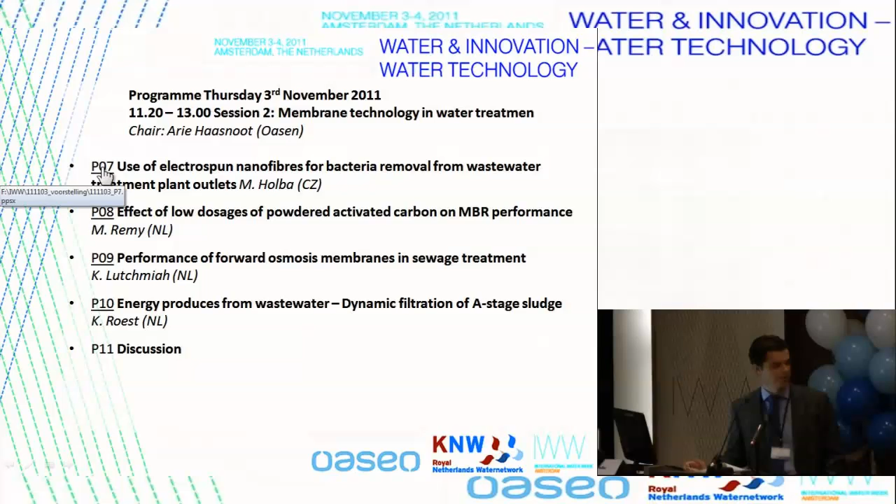I would like to invite, as first speaker of this session, Mr. Marek Holba. He works at the Academy of Science of the Czech Republic. He graduated in 2003 on wastewater treatment, and he will talk to us about the use of electrospun nanofibres for bacteria removal. Mr. Holba, may I invite you?

Okay, thank you for the introduction. My speech will be about the use of electrospun nanofibers for bacteria removal from wastewater treatment plant outlets. This research is part of a huge grant project of the Czech National Foundation that involves ASIO, an engineering company. I'm actually from ASIO. Another medium enterprise is there, a company called Spur, that owns the device that is able to produce nanofibers by electrospinning.

Then other institutions are involved: the Mendel University in Brno, the Institute of Botany, Academy of Science of the Czech Republic, and the last one is the Center of Organic Chemistry of Pardubice, which is responsible for synthesis of materials.

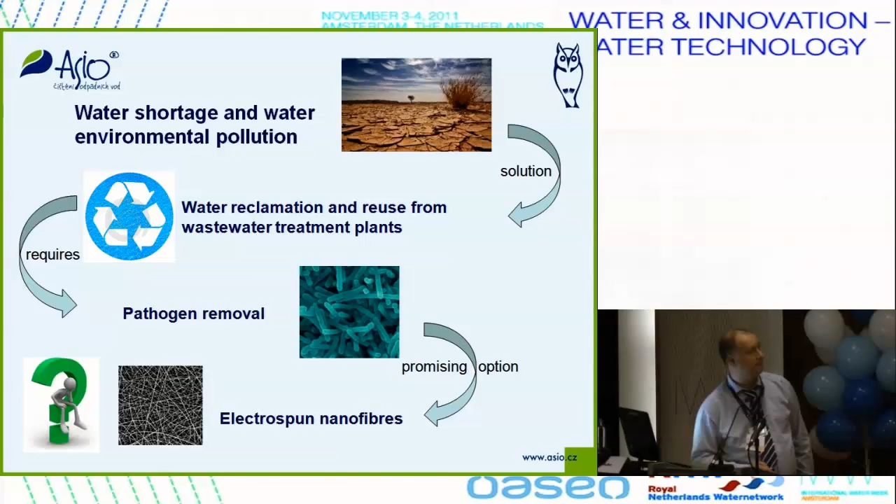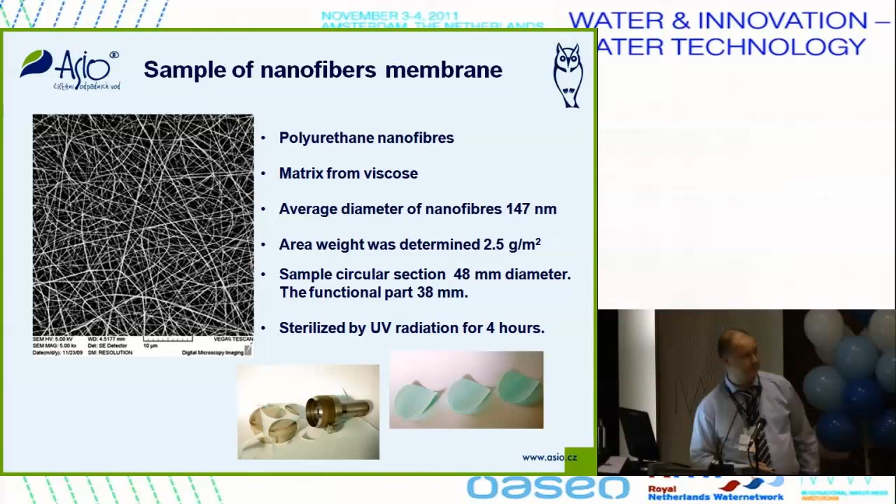Here you can see the scanning electron microscope picture of the electrospun nanofiber. For our research, we started to work with polyurethane nanofibers that are placed on a matrix of viscose. The average diameter of the nanofibers was 147 nanometers. Before the nanofibers were used, we sterilized them by UV for 4 hours.

We decided to take samples from 3 different wastewater treatment plants that also have very different technology. The wastewater treatment plant for 500,000 population equivalent has to fulfill very strict outlet limits, which are 1 milligram per liter of total phosphorus, 12 milligrams per liter total nitrogen, and 45 milligrams per liter of COD.

Then we chose a wastewater treatment plant for 8,000 population equivalent that has to fulfill less stringent limits, about 3 milligrams per liter phosphorus and 25 milligrams per liter total nitrogen. And we also chose a very small wastewater treatment plant which has less stringent outlet limits: only suspended solids, about 70 milligrams per liter, and COD about 150 milligrams per liter. Of course, different technologies are used, and very different amounts of bacteria were expected in the outlets.

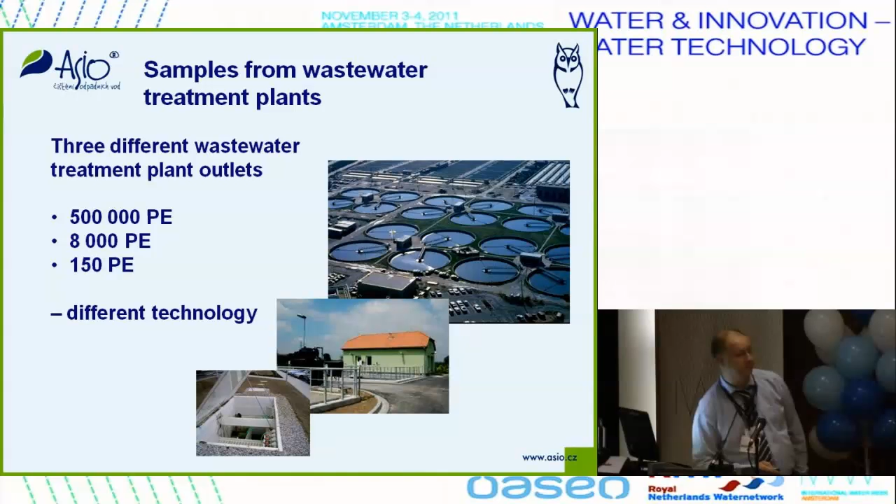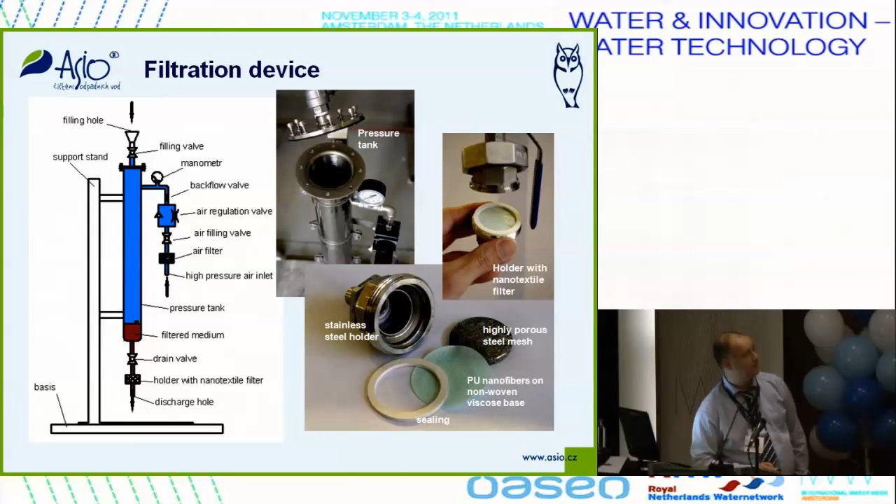This is the testing device which we used for our tests. This is how we performed the test. We took 100 milliliters of the grab sample and placed it into the device. We applied a pressure of 1 bar, filtered the sample, and measured the concentration of microorganisms after filtration. Here is where the nanofiber is placed. The device was always sterilized before every measurement.

We decided to compare our results with national legislation about water reuse, or reuse of the water from the outlets of the wastewater treatment plants, which is possible by Czech national legislation. There are several standards, and most of the standards are focused on those kinds of microorganisms: cultured microorganisms at 22 degrees and 37 degrees, then thermotolerant coliforms, then Escherichia coli, and intestinal enterococci.

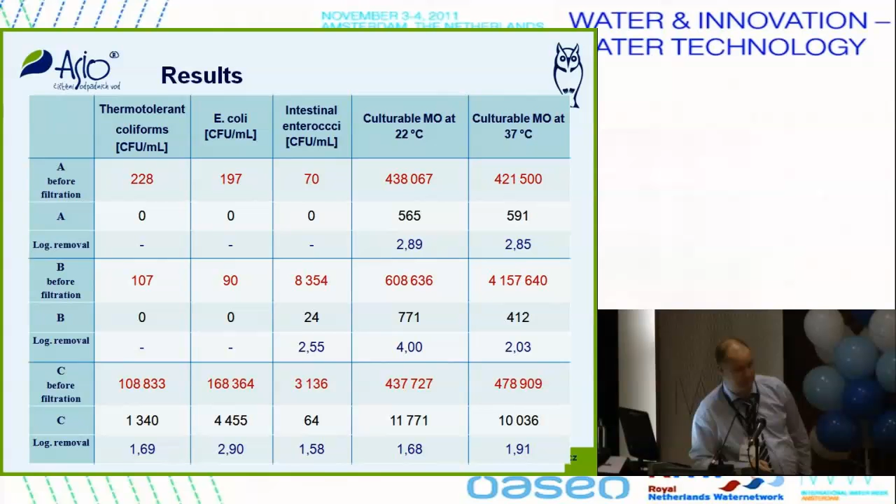We always calculate it as CFU per milliliter and triplicate every measurement. Here are the results of our experiments. That's an average from several measurements. As you can see, it's visible that plant number C, which is designed only for 150 population equivalents and doesn't have such advanced treatment, has so many microorganisms. And as you will see also in other slides, it doesn't fulfill most of the national regulations on standards for water reuse.

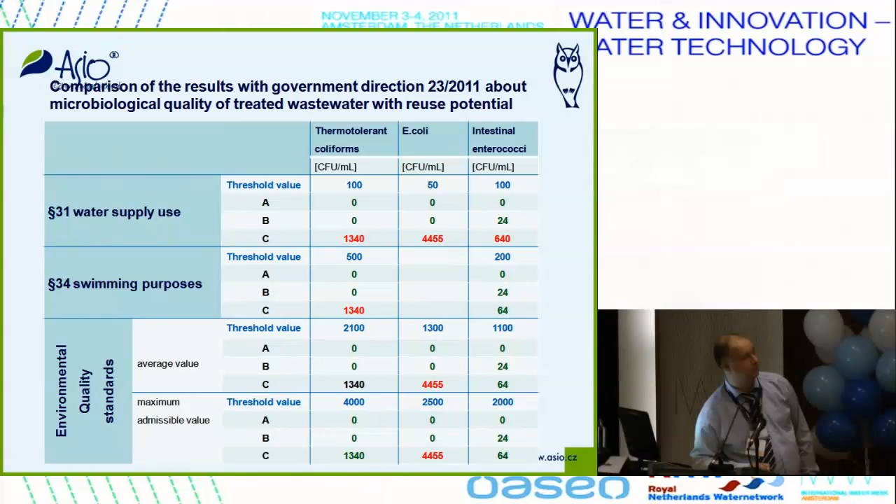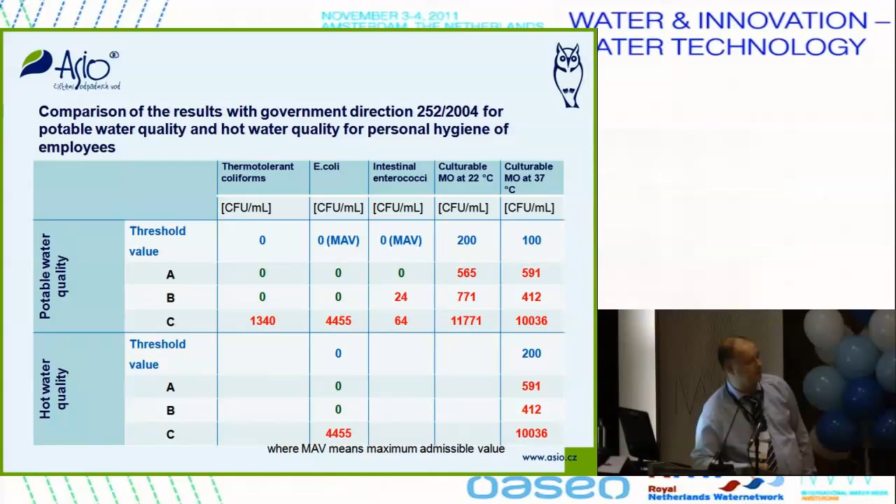Another government direction which we are trying to compare to is the government direction for potable water quality and hot water quality. There are also other microorganisms mentioned in this direction, but we did only those 5 because it was necessary for most of our tests. So as you can see, for potable water quality it was impossible to achieve values lower than the threshold value, and also for hot water quality.

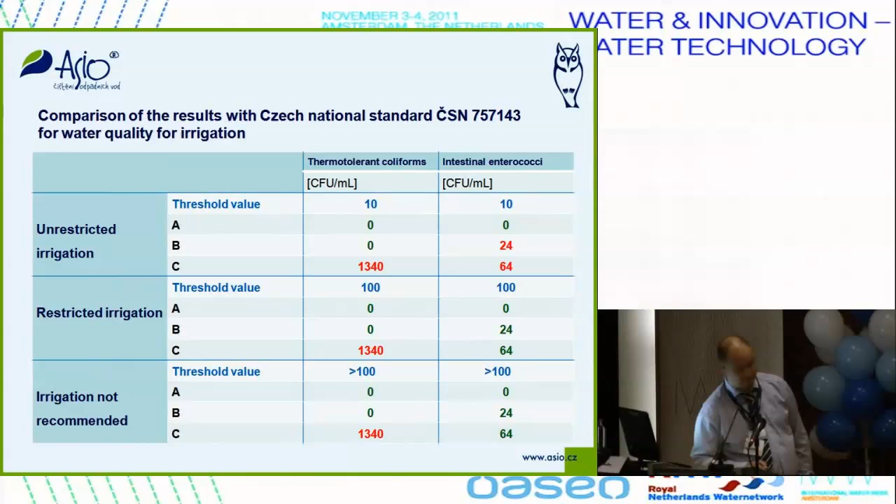The main conclusion: we started this research this year, so we are just trying to find applications of nanofibers in environmental protection. We are trying to do air treatment. The second thing we are trying to do is apply them to wastewater treatment plant outlet filtration for other kinds of reuse, and we can decrease the amount of bacteria in the treatment plant outlets by log 2 or log 3. However, it's not sufficient enough. If I remember, if we use ultrafiltration membranes at the treatment plants, we can achieve log removal of about 3 to 5.